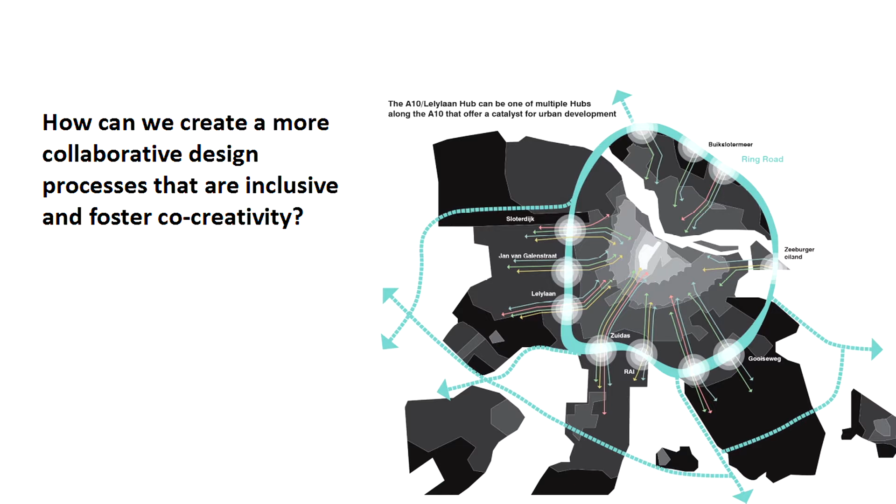UNStudio has been exploring the workings of the invisible city since the early 1990s in the form of flow structures of interconnected mobilities. Our premise has been that the servant spaces, the ignored in-between, and the crude machinic leftover spaces have always been full of potential. And they were also deserving of quality. They had the potential for quality.

More and more of our daily lives are spent in real and virtual, or a mixture of both, networked infrastructures. We want to engage with this reality in a questioning way. The network society has been a theoretical and scientific concept for some decades now. But how can we, in our design practices, use this concept, give it a creative meaning, and thereby bring our own discipline a step further?

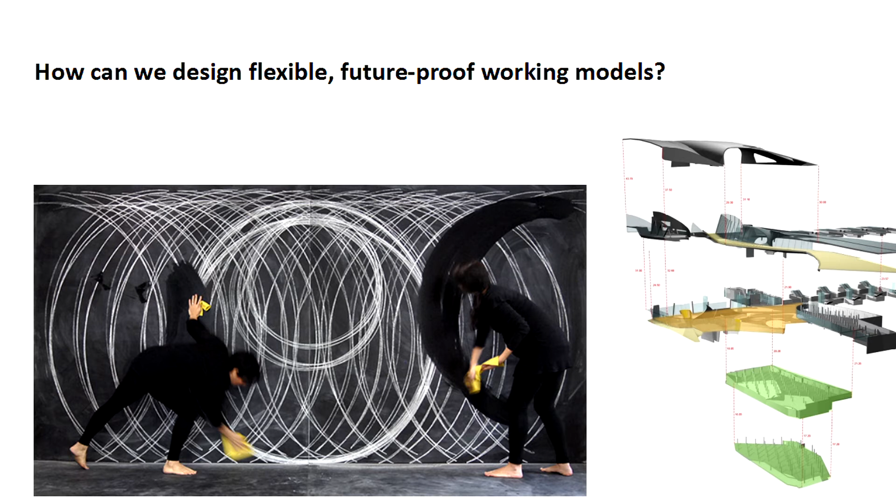As architects and urban designers, we have always been engaged with the future. You could say we partly live in the future, because we know that what we are doing is for the future. And we are therefore familiar with the future to some extent. But what about the disruptive effects of technological changes? Can we adapt our processes to accommodate unanticipated changes? Can we find models of flexibility and resilience, like our two acrobat artists, that fit with our practiced ways?

Someone I admire, Doreen Massey, wrote, "How in the face of all the movement and intermixing can we retain any sense of local place and its particularity?" And I think this is a question that resonates. I always find that when I speak somewhere, this is ultimately for many people the most important question.

And Doreen Massey continues, "Can't we rethink our sense of place? Is it not possible for a sense of place to be progressive, not self-enclosing and defensive, but outward-looking? A sense of place which is adequate to this era of time-space compression. We must react to the hyper-mobility and flow of our time with our architecture."

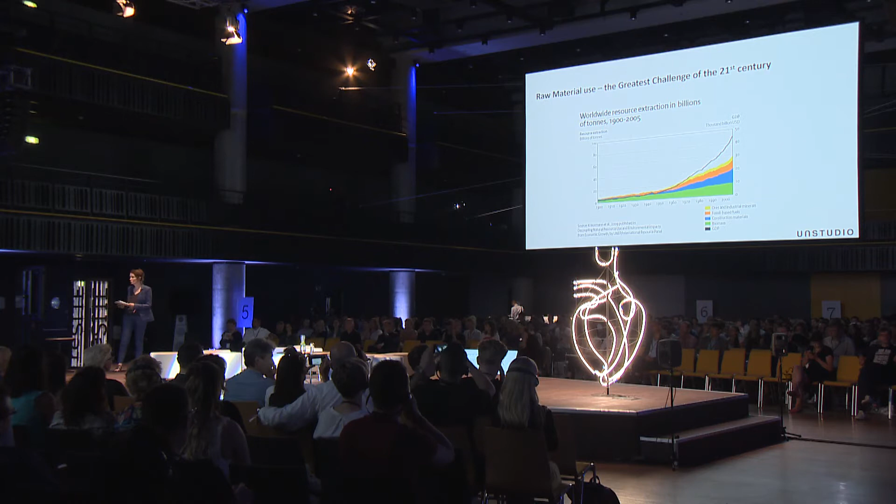There is potential for innovation, which alone is interesting to us, for new qualities that enrich the city and make it attractive to new generations, to new people that we want to keep inside our city, the best talent. And there is economic benefit in increasing resource efficiency and decreasing resource dependency and waste.

Maybe as architects we are not so used to considering resources. We maybe don't yet have a philosophy of resources that we feel comfortable with. But why not think about it?

At least some of us will find an inspiration in this new way of thinking, maybe, beyond opportunity, beyond economics, although they are very real, and also beyond ideology. UNStudio has been trying to work with these principles for several years.

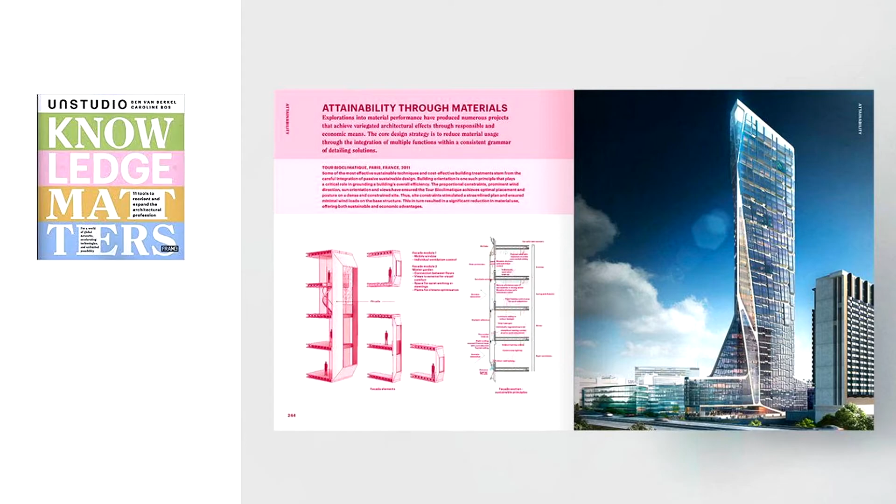This, for instance, is a project that we tried to realize. It was a pitch in Paris, Tour Bioclimatique. It is an example where we have natural ventilated double facades. And these encapsulate new ways of working, new workspaces, so sustainable principles and attainable principles are also combined with parametric design. There's a parametric form finding because the very parameters that we select can also contribute to very particularized and site-specific forms of circular thinking.

Like all architects, we do not even protect our own creative resources. This is all stuff that we are almost daily throwing away. We design so much that is never realized. How can we be smarter and learn from what we learn? Just giving a name to what we are trying to do can help. It can bring us a step forward. Our visions and ambitions can become systemic themselves, can become more productive if we dare to call something that we want to achieve something.

And even in the history of our own short time here as a practice, there have been so many disruptive innovations in architecture already. For a practice to be working more or less fluently in the worldwide field of architecture requires almost military strategizing. How do you position yourself? At the same time, the complexity of that all is so vast that plotting your progress is hopeless. Things just happen or not.

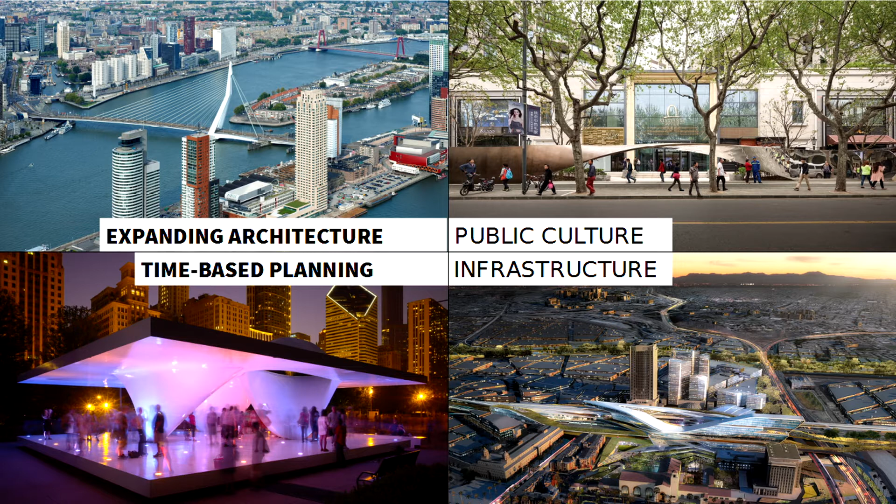And sometimes maybe things are just in your DNA. Being a Dutch practice, we have very strong Dutch DNA. And like Dutch people giving each other more flowers than any other nation, the Dutch culture is also one of a history of big interventions, which can be totally experimental and which are carried through. UNStudio has always liked diversity. We embrace different scales, programs and places. So the experimental approach just suits us completely fine.

Typology is there for us also to be disrupted. How can you become unstuck? So let's not think about housing. Let's not think about a museum. Let's not think about a train station. How can we reframe that? This is a very important question to us. Not to lose the advantages of experience. So we still want to take the resources that we build up internally ourselves seriously, but at the same time we want to keep the experiment going.

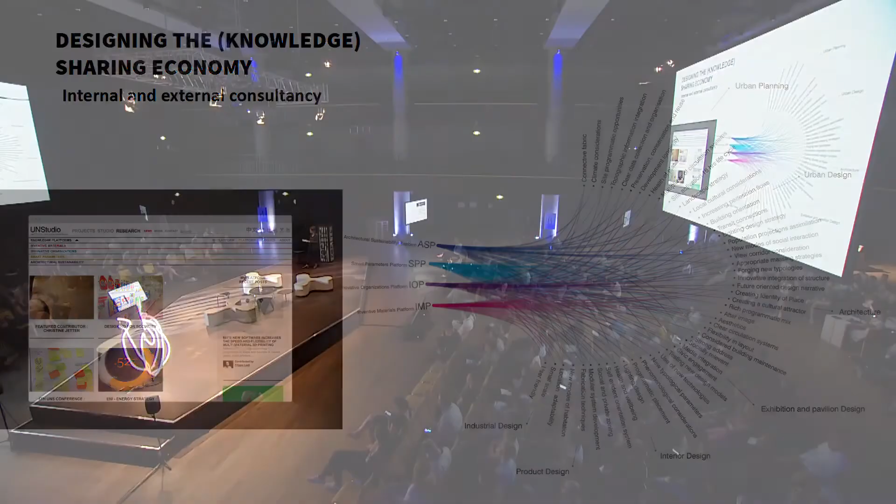For the last 5 years or so, therefore, we have seriously sought to become immaterial ourselves, to turn ourselves into a knowledge platform, at least partly. Of course, we also still do projects, but some of our essence we would like to see become dissolved in the ether. And we confront an enormously impactful change. If open source and sharing are where the world moves to, what does that mean for our processes?

You don't have to engage with that, you might argue. No one is holding a gun against your head. Why should you become open source? Just keep going as you are. But don't we want to celebrate our own time? And what about the future? How can we begin to envision a future of which the only visible signs are the atomization of knowledge and a sense of being able and also entitled to instantly connect to anything, anywhere and anytime?

Reorganizing ourselves to meet these disruptive innovations has become something UNStudio does. It's a habit that begins at home in Amsterdam, where we practice our knowledge sharing. And this then in turn also facilitates how we practice in the world. We've become accustomed to the fluency of that process in different places. So just a question, could it be that this is in a way working towards circularity?

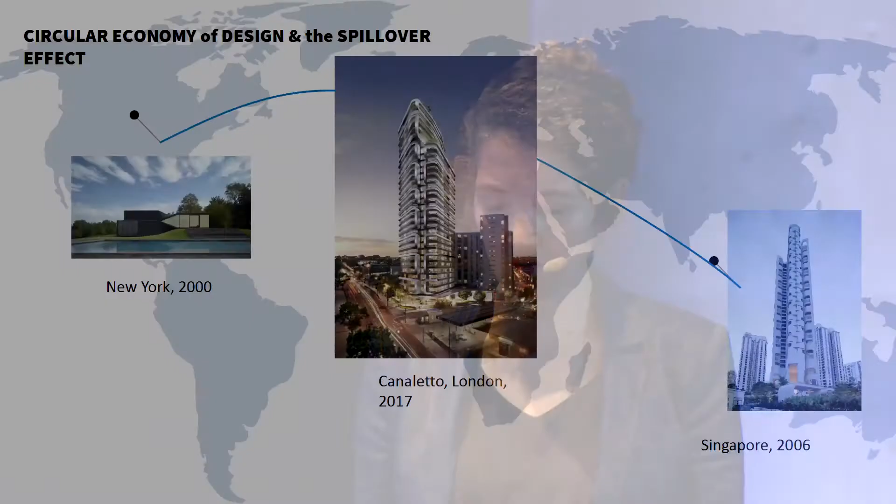Design reputation is an architectural resource. It travels across the layers and subdivisions of the global system. There is no literal formal repetition in architecture. That is not the type of efficiency that we cultivate. But we translate, we communicate, and we enlist participants, thereby bonding across cultures.

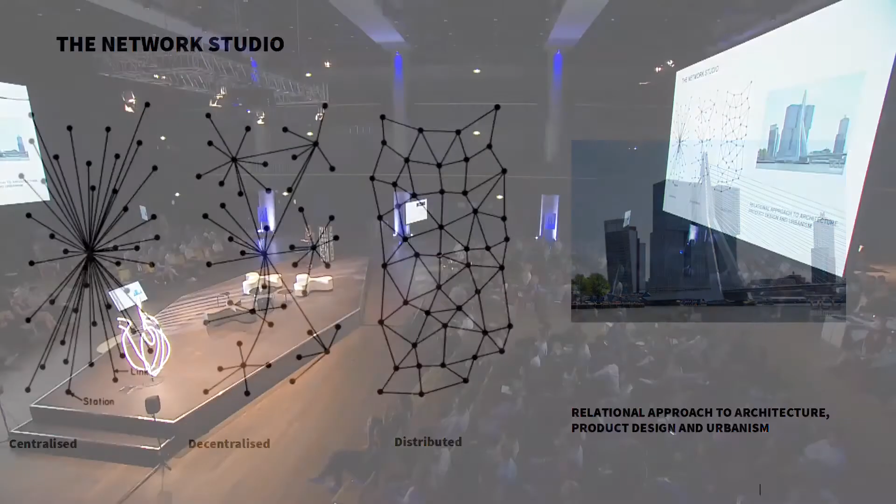Our interest in networking, in the network, and in fact, I just quoted from some network theory when I mentioned the word enlisting by Bruno Latour, we are very interested also in understanding what we are doing at a level that goes beyond the very pragmatic. So our interest in the network actually stems from that earlier mentioned project, where we had to learn a new form of control. We were a young, inexperienced practice, had built only a tiny little project, one exhibition design and one small regional office. And suddenly we were in charge of this big project.

Obviously, you cannot execute your vision in a top-down manner in that position as some extremely respected architect might be able to do later in their career. I doubt that that will happen to our generation, as we seem to have lost those ways completely, which I think is a good thing. So new concepts of control are key. And this is where we go to this project already mentioned, Arnhem Central. Immediately after the Erasmus Bridge was completed in 1996, we embarked on this project, which then took us 20 years to fully complete.

At the basis of this project are five important needs that are actually interconnected, that are interpreted by us as relational in a non-hierarchical way. So we can't say one need takes precedence over another, or one value can override another.

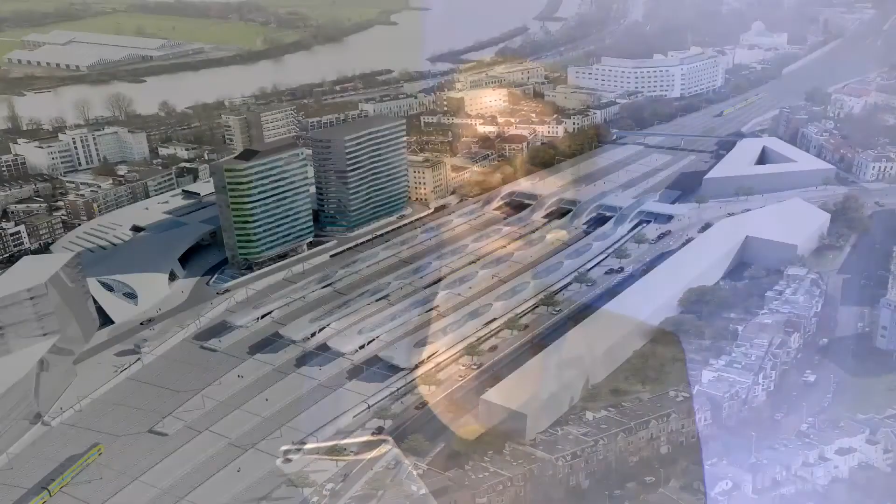Those needs are that there was the need for a whole new transfer hub. The old railway station had long been superseded, was far too small and ineffective, and there were some bus stations around it that were also in need of upgrading. Urban regeneration was an important aspect of that, and densification. Then there was a need for external funding. There was no way the municipality, who became the primary actor in the process, could fund the process by itself.

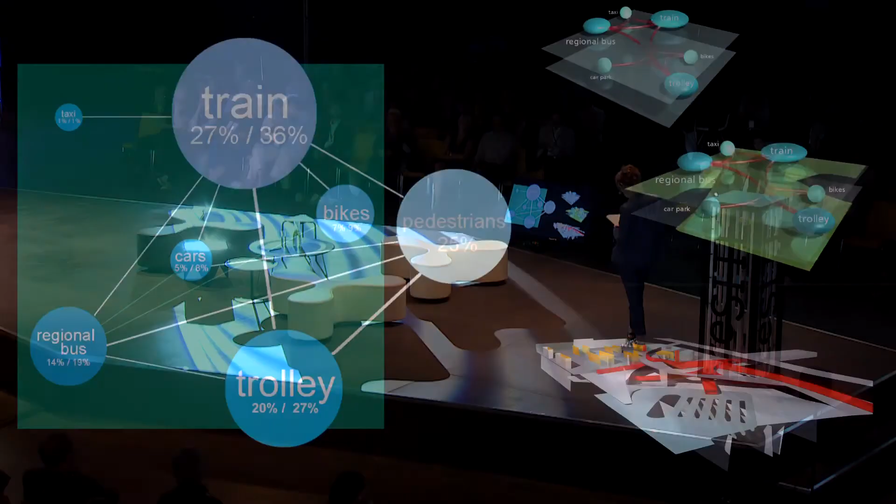Enhanced connectivity, both within the city and outside, was important. And also an important design consideration was that the station needed to continue to be fully operational all the while during the process.

So we started with this very first early analysis, where we could encourage from this the municipality to take control. They could be, as I said, the primary actor, the initiative taker, rather than the national railways, who were actually the most important stakeholder in terms of business and in terms of land ownership. But this diagram showed that, in fact, in terms of use of the location, they were not, because the train was only, depending on how you would calculate it, used by 27 to 36% of the people, and the location was more used by others.

And as I've just tried to argue, when we are thinking in terms of circular principles, reuse also becomes a very important resource. A very important way to learn concepts of control also for us was the development in this project of what we now call resilient concepts.

When you are dealing with a project that is taking place in a phased way over a long period of time, it's very important that your design principles are so strong that they are able to stand all the different disruptions that happen over a 20-year period of time. You get political changes, you get financial setbacks, you get whole new technologies and conceptualizations. So how, as a designer, can you think of tools that can hold up through all these changes? Those are actually super resilient tools if you manage to find them.

For us, we found the solution in very abstract concepts that have a strong geometrical basis. So they are not directly related to specific forms or ideas, but they have a more abstract model that can be interpreted in different ways and that can be adapted as changes happen. Here we see, for instance, the central twist to the project is an example of that. Here we see it finally executed. It was executed quite similarly to the Erasmus Bridge by a shipbuilder in steel, whereas originally it had been conceived by us in concrete, and the lower parts of it still are in concrete.

So this project takes place also over many layers, and as we can see in the image on the left, the complete integral approach to it means that the leftover in-between transitional flow spaces that I mentioned, such as, for instance, an entrance to the parking garage, as we see on the left, has daylight in it and is also turned into a space of quality.

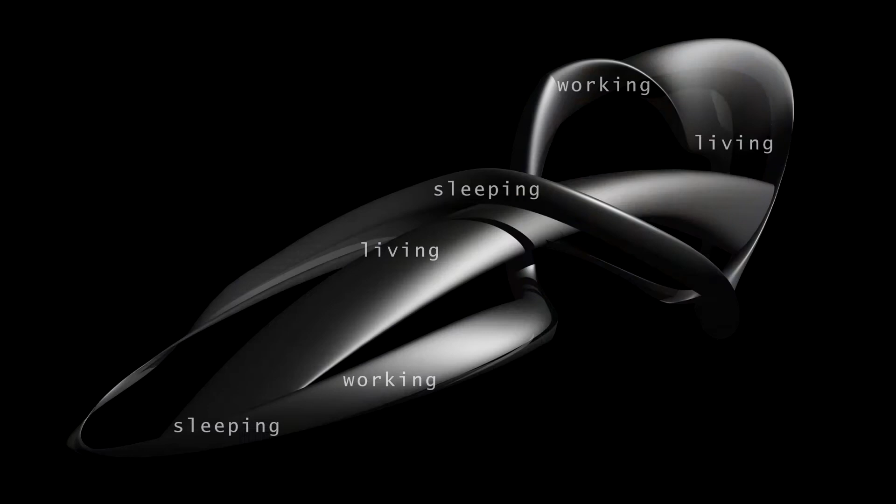Now, another important aspect when dealing with disruptive technologies is, of course, how do you deal with technologies? Again, this is something that we have, from our earliest beginnings, found very interesting and inspiring. The Möbius house, for instance, we made this model 20 years ago, and this is a recent photograph of the house. And what is very remarkable is that the people who it was designed for still live there very happily in the same way as was originally envisaged.

Now, this house, you could say, in some ways could not be more inflexible than it is, since it is very much built out of concrete, and even the concrete takes up some of the furniture. But it has been able to accommodate changes over a 20-year period of time.

So I think if we seriously begin to study post-occupancy issues, each of us in our own projects, but also in general, we might find that flexibility and adaptivity are also very complex issues and need a lot of fine-tuning and forward thinking, rather than seeing it in a very simple way of providing the most neutral space possible, and then, of course, it is flexible. In reality, the issue of flexibility, adaptivity, and resilience turns out to be far more complex.

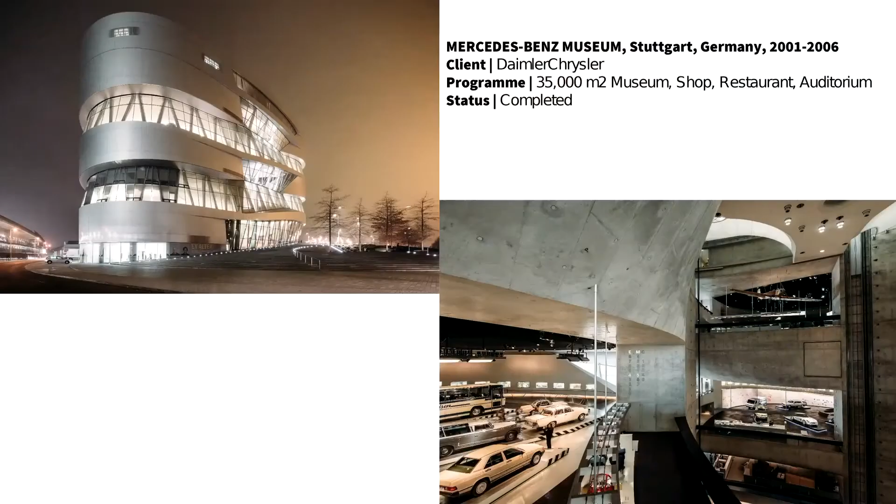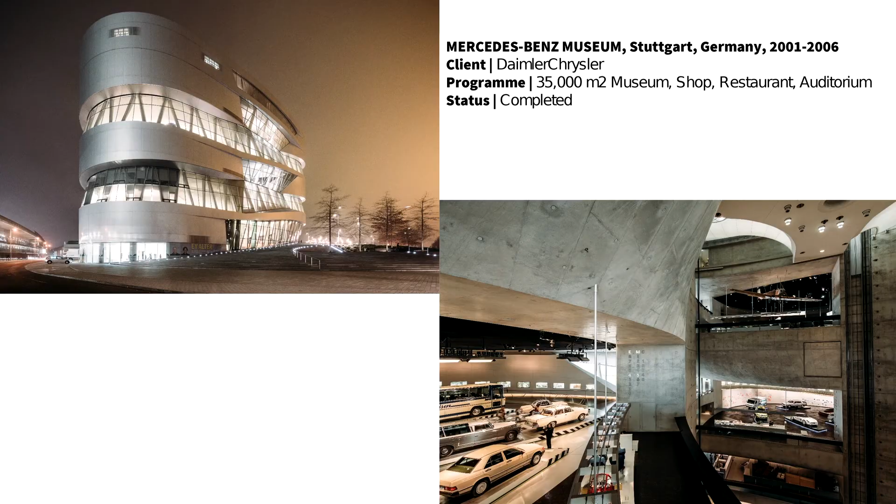And now, a very recent, almost completed project in China also works on the principles of very highly technological integration, and also bringing a sense of infrastructure to a different scale. The Möbius house was already bringing that to the domestic scale. People walk around the house. The walk around the house is the basic organization of the house. The Mercedes-Benz typology is also about walking through the building, the paths that lead you through the collection. And this project brings that to yet another and far more encompassing scale level, where we again believe very much in daylight being part of the quality of the spaces of flows.

Then our last pillar of circular thinking, designing for the future, also means designing for health. This is a very recent little study that we presented at Salone in Milan, which is a first study into how spaces can affect your stress levels. I think Martin also pointed to quality of life, and quality of life also during work, being something very important to consider. And what are the new technologies that we can find to help us implement this?

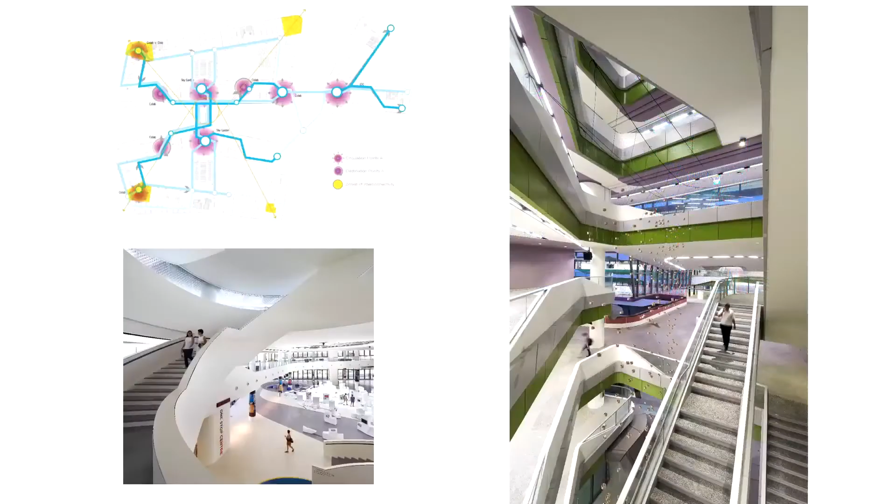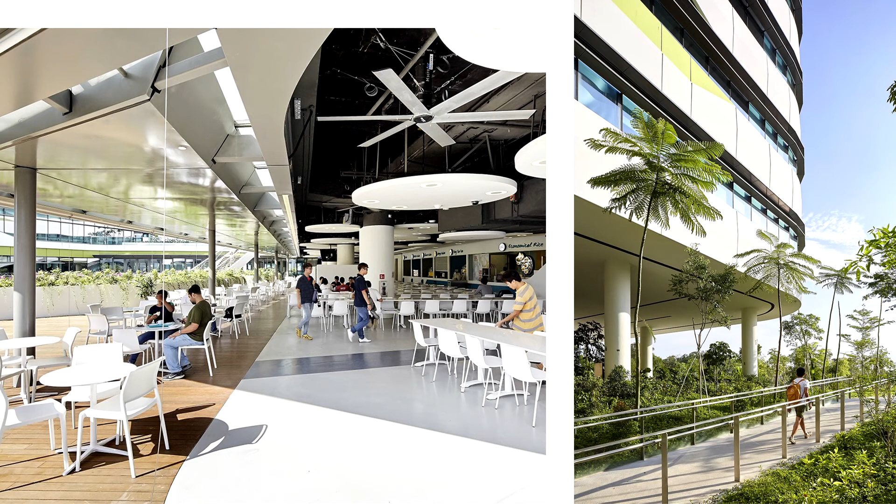Another very recently completed project brings this to the scale of the campus. New ways of working where sustainable issues are fully integrated with these health issues of creating walkable surfaces. So within this campus model, two spines have been identified, a spine of learning and a spine of living. And within those two spines, there are these nodes, nodes of activity, active hubs, where cross connections happen, where informal learning takes place, and also where inside and outside conditions often mix. For instance, this cafeteria can be open air, but can also be closed off and then air conditioned. Thereby, in the overall building, we limit the need for air conditioning.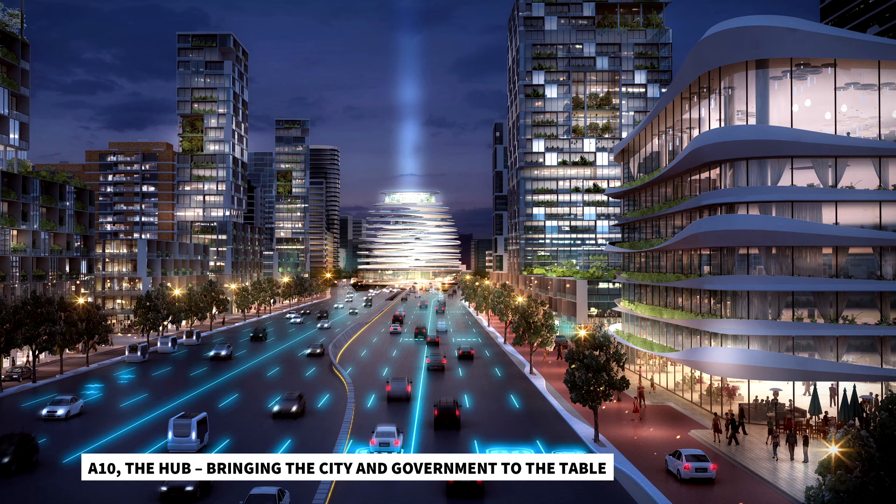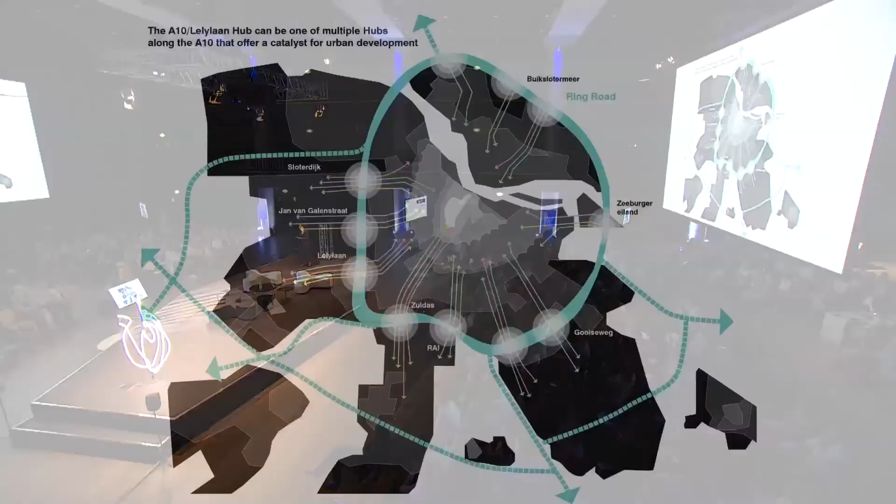Now, finally, a very latest experiment where we are, together with many different partners, also thinking for Amsterdam about the future of the city, bringing circular thinking to this project. This is the ring of Amsterdam. As in the future transportation will change, this will release a lot of infrastructural space. We can see that the ring, which is at present very low in density, has very, very good connections all around, both to the city center but also to the outside.

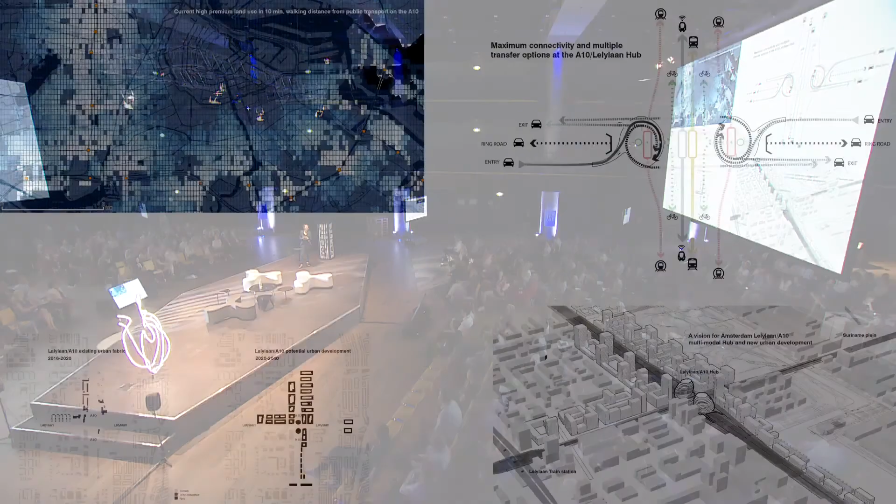And we have worked with different partners on looking at those locations, looking at the possible densification models that can be made there, how they would be distributed, what the new infrastructure would look like, and we have also studied, with an organization that has a data bank of ground values, how ground values come into this study.

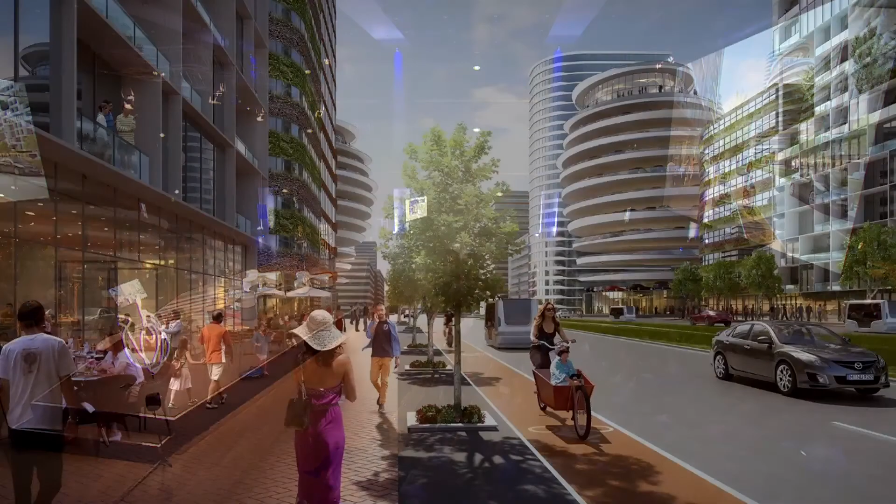So to conclude, it is to be expected that a city with a circular mobility system could replace excess infrastructure with housing, workplaces, green spaces, etc. Here we are even foreseeing that these buildings will be energy generators themselves. These hubs will take on many different identities. By 2030, effects such as sharing mobility services, the materials evolution, and system-level integration of different transport modes can contribute to resource savings of nearly 400 billion euros as compared to now. And these three factors are all factors that we, as architects and urban designers, can contribute to.

This is the first time that I actually end a presentation with naming figures, particularly euros, dollars, etc. But as I've shown, I believe very much myself, and UNStudio does too, that it is more circular thinking, and the principles, the opportunities for generating new qualities and innovation that really are at heart here, and which I look forward to discussing with you.